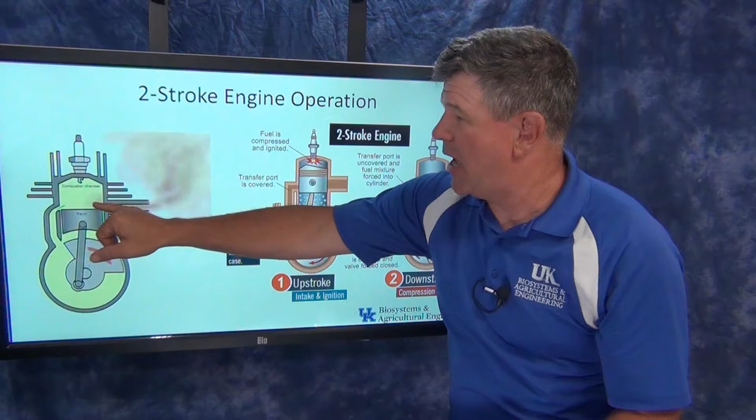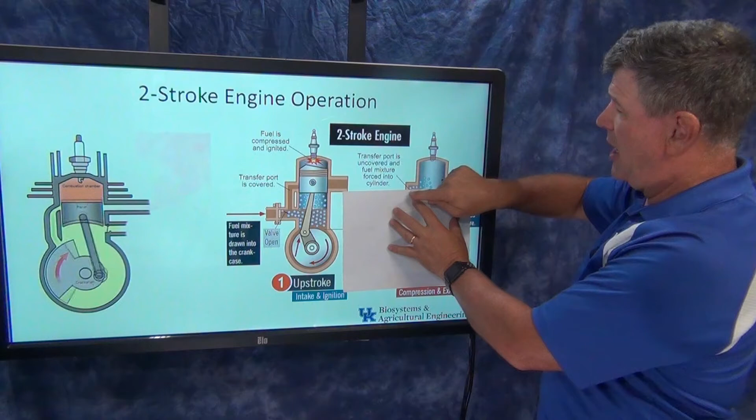And we kind of see that over here on this animation. As that piston is coming down, we see that exhaust gas start to sneak out on the right-hand side. Now let's go back here. As that piston keeps coming down, we've opened up that exhaust port. Now if it goes a little bit more, we open up that intake port, and this is where the clean gas of the air-fuel mixture can come in.

Well, how does it come in? Remember I said it was very critical—this area underneath the piston is really critical. So as that piston is going up and we're compressing that air-fuel mixture in the top of the piston, that's also bringing a negative pressure in here. So what happens is we're actually sucking some air-fuel mixture into this area underneath the piston.

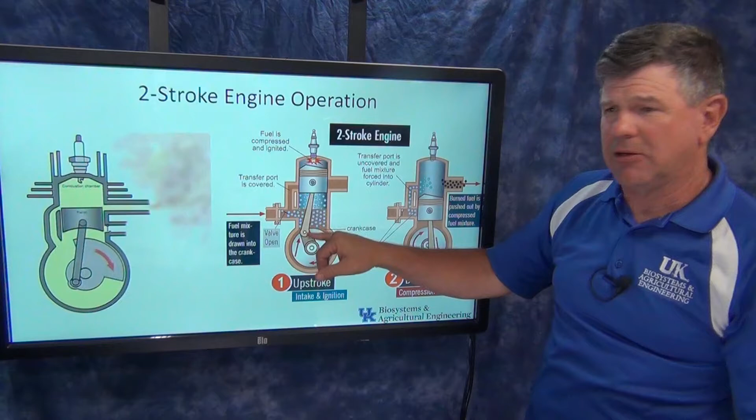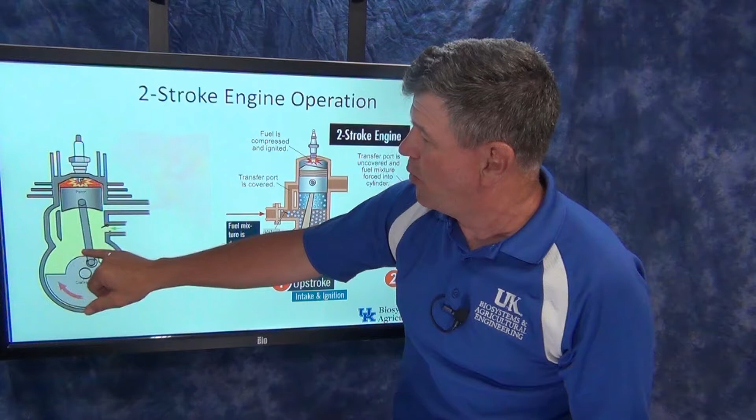Okay, so over on this animation, we see this little flapper valve, a little check valve that's allowing that to happen. So as that piston comes up, we see this air-fuel mixture coming into this area down here. Now, as the piston comes down, it's going to open up this port over here. As the piston's coming down, it pressurizes it just a little bit, so this air-fuel mixture underneath the piston is under a little bit of pressure. When this port opens up, that's going to want to pop this air-fuel mixture up into the combustion chamber up here.

So this pressure on the bottom forces that to go up into the combustion chamber. We've got a lot of things happening all at the same time. As this piston is coming down, we're letting the exhaust gas out, and we're also allowing the fresh gas to come in. So the clean gas is kind of pushing the exhaust gas out of the combustion chamber.

Okay, so again, two strokes. Now think about how much power it has. Remember we talked about the bicycle analogy on a four-stroke engine. It's like only pedaling every other time. So we pedal once, we don't push the next time. Then we push, and then we don't push.

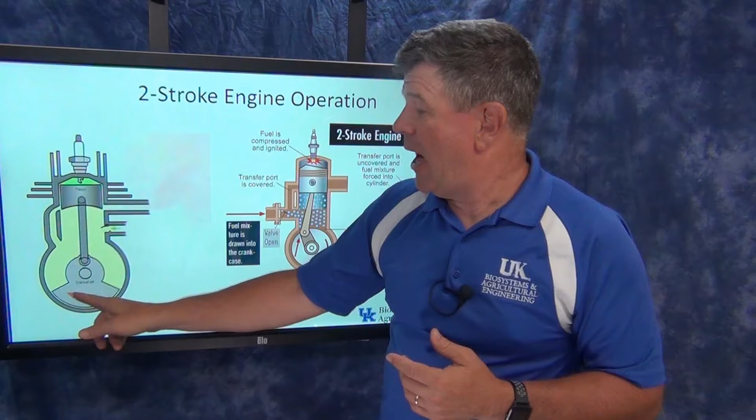Look what's happening here. How many rotations? One rotation where I come down with the power, the exhaust, and the intake, more intake as it starts back up, and then it compresses, and then another power stroke. So on every revolution of that crankshaft, I get a power stroke.

So that's going back to my bicycle. That's like we would normally do on a bicycle. We push every time that we come around, we're actually pushing. So we're going to get a little bit more power potentially out of a two-stroke engine, okay? But what are the problems with this?

We're going to list these out here in just a second on the next slide. But let's think about this. As this exhaust gas is leaving over here and the intake gas is coming in, is that going to be a clean exchange? Probably not. So as that exhaust gas is coming out and the intake gas is coming in, there's going to be a little bit of mixing in between.

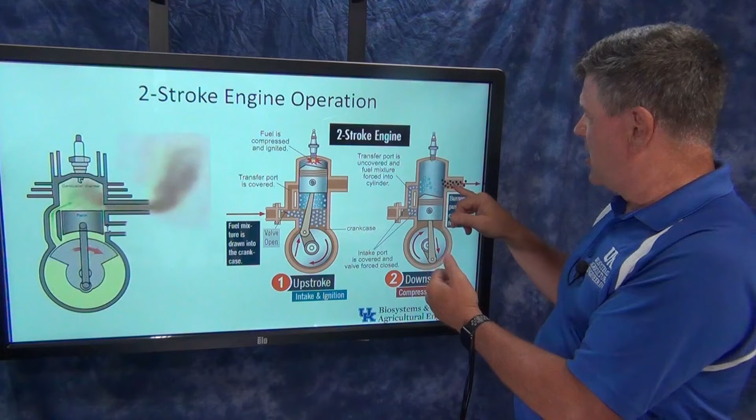So I'm either going to have some of the clean gas, the air fuel mixture, going out with the exhaust, which means unburnt fuel then is going out of the exhaust, or I'm going to leave some of that exhaust gas in that chamber there. So both of those things could be bad, could cause me some problems.

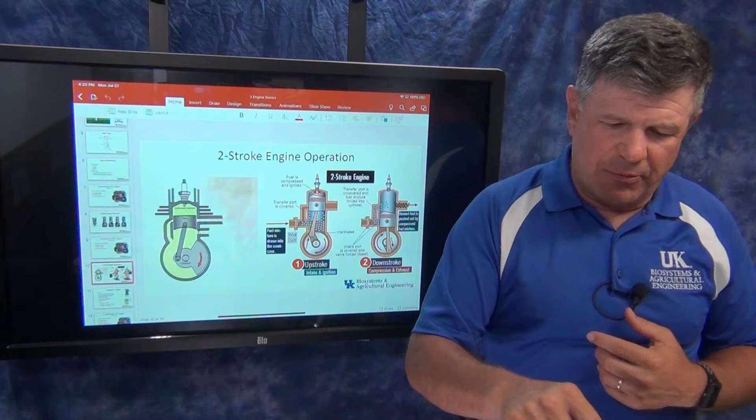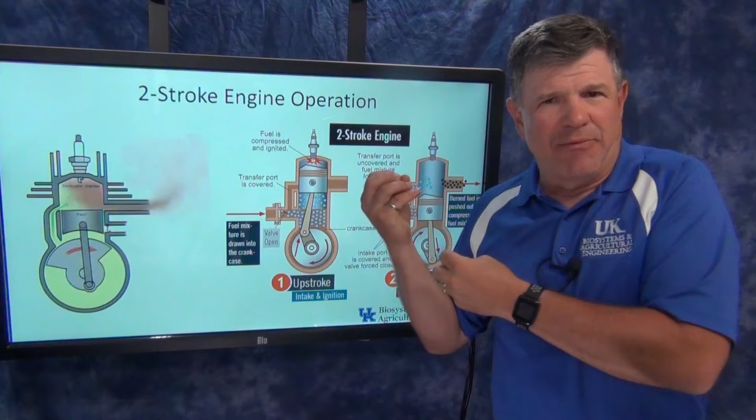So that could mean some not clean burning. If I've got exhaust gas in there, it may not burn as cleanly. If I've got air fuel mixture going out, then I've got some stuff going out the exhaust that I don't want going out the exhaust. So now I've got some emission problems. That's one of the fundamental drawbacks of a two-stroke engine, this idea that we've got some potential emission problems in there.

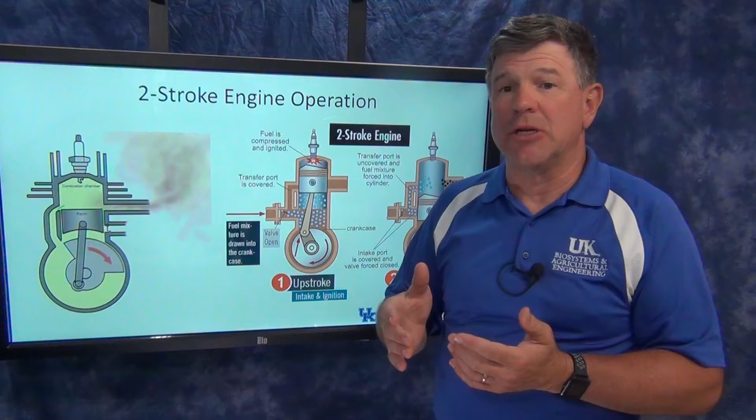The other thing that goes on with this is that because this is an air-fuel mixture in this chamber underneath the piston, I've got to have lubrication in there. If I go back to my four-stroke engine, I'm going to put lubricating oil in there and just let it lubricate. I can't put oil in here. So what do I do? I actually mix some lubricating oil with the gasoline or with the fuel as it's coming in. So this is an air-fuel mixture in here, but there's also a little bit of lubricating oil.

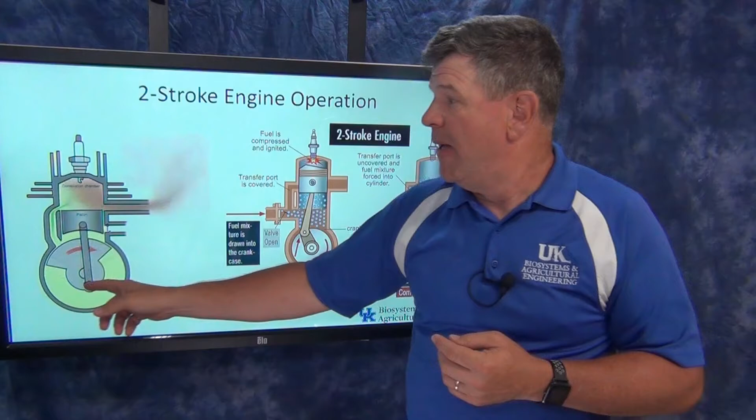Guess what? That lubricating oil is going to go up in here and get burnt. What happens when we burn oil? It makes smoke. And so we've got some more emissions issues out there. So those are kind of the trade-offs.

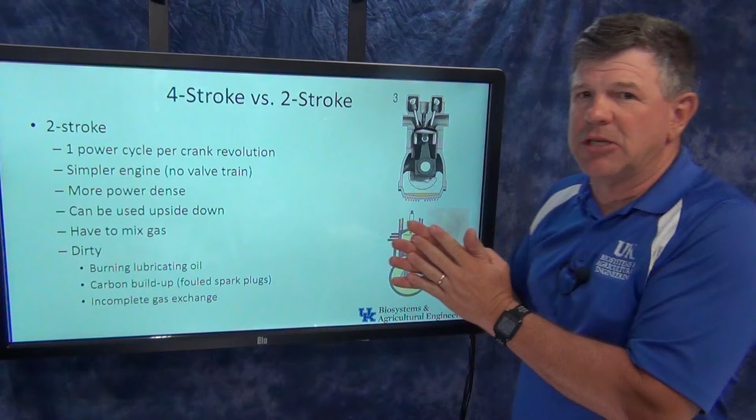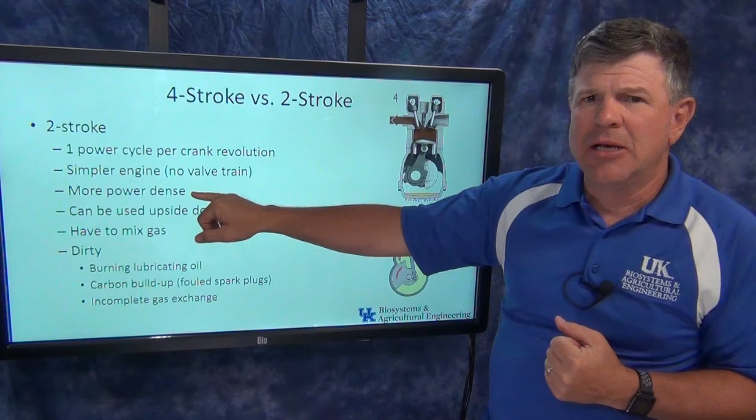So let's list some of that out and think about two-stroke versus four-stroke engines. First of all, with the two-stroke, we'll focus on the differences here: one power cycle per revolution of the crank. That's a good thing, okay? So I get a little bit more power out of them. We talk about them being more power dense because of that, and really there are two reasons.

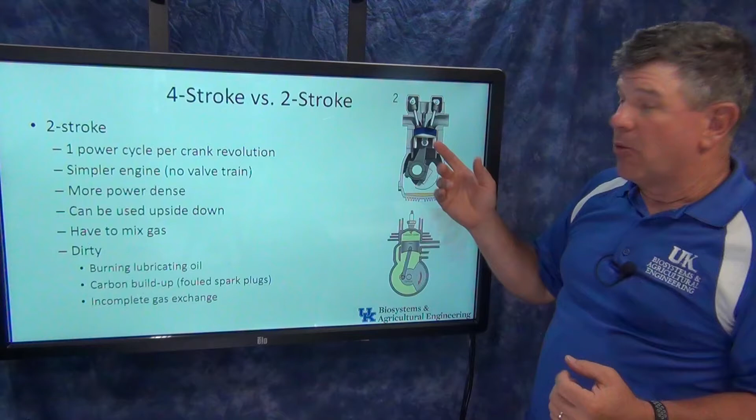So we get one power cycle per crank revolution, and it's a simpler engine. Remember on that 4-stroke engine, we had to have valves and camshafts to open up and let the gases come in and out. Down here, there's no valves, just ports that I'm opening and closing, so it becomes a much simpler engine.

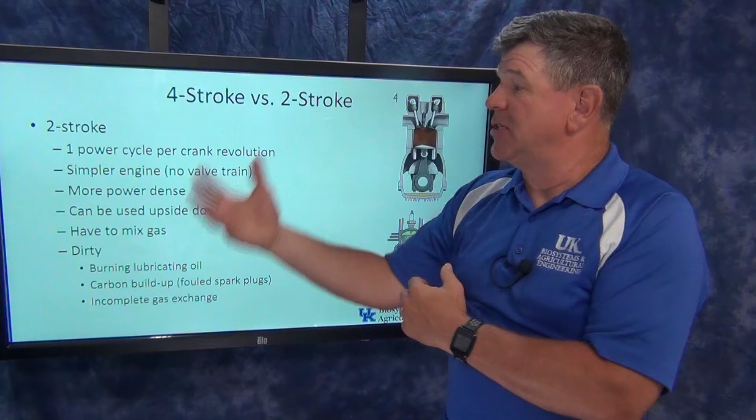That's one of the nice things about the two-stroke. It's a simpler engine, which means it's a lighter engine, and I get one power stroke for every revolution of the crank, so I can get more power out of it, so they can be more power dense. This is why you see two-stroke engines in performance motorcycles, competition motorcycles.

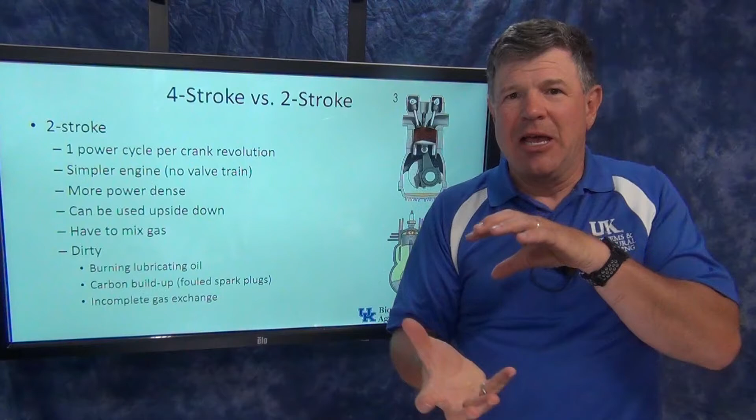I can have a lighter motorcycle and get a little more power out of it. In a performance setting, emissions, okay, I can deal with some emissions. You see a lot of these in small gas engines like chainsaws and weed eaters, string trimmers, because one of the other things is I can turn this engine upside down. It works in all different orientations. This one may or may not, because if I get oil up against this piston, it may cause problems if that engine's not designed correctly, so those are some things I have to be thinking about.

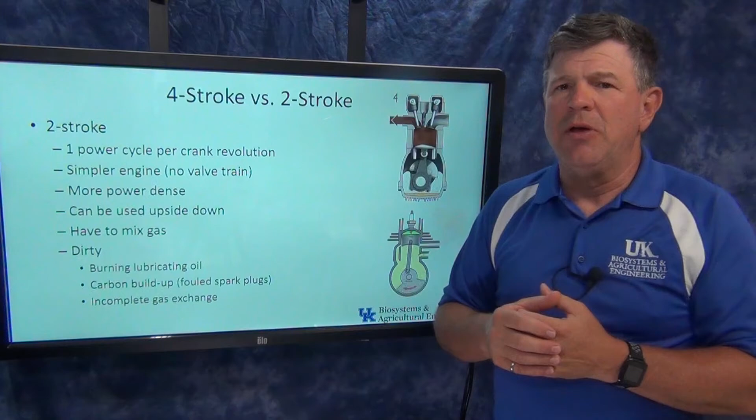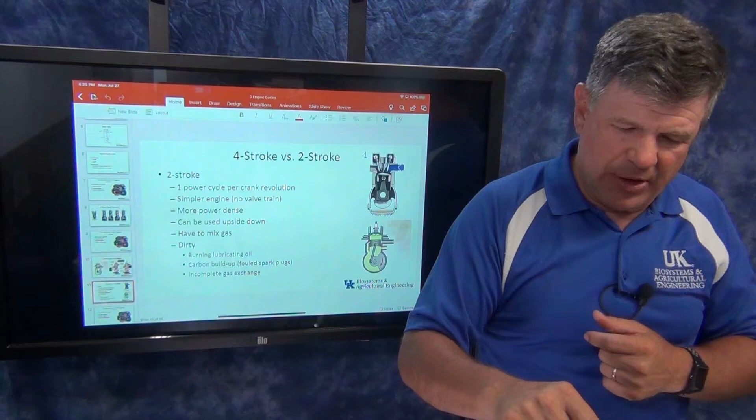So again, it can be more power dense, I can get some more power out of it. That's one of the differences between a two-stroke and four-stroke. They can be used upside down, but I have to mix my gas with a two-stroke engine. I've got to put some lubricating oil with that fuel, so that fuel has to have the lubricating stuff in it as it goes through.

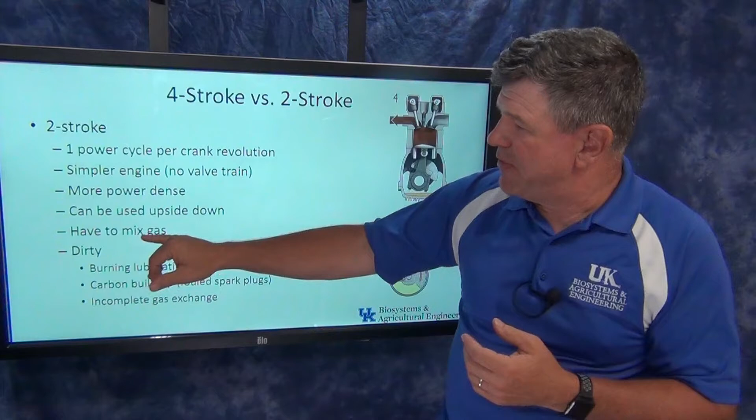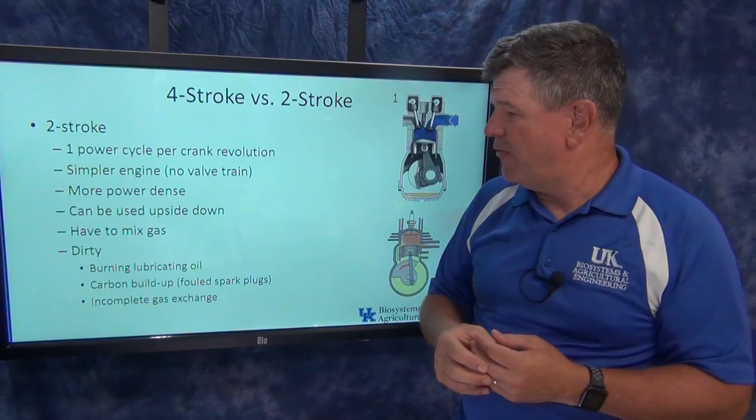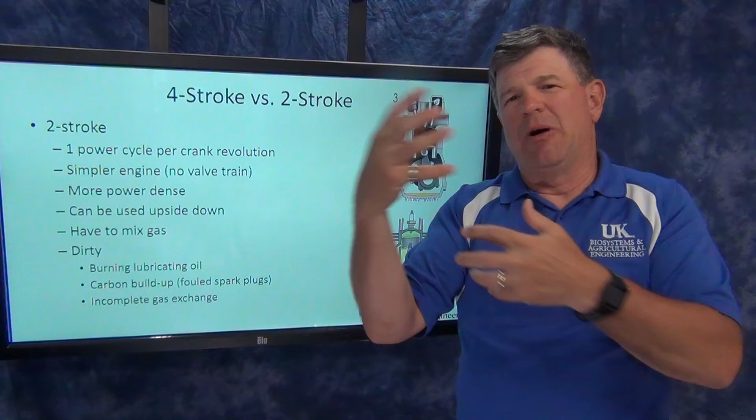And because I'm burning that lubricating oil, that's going to mean my exhaust is a lot dirtier. I'm going to have some carbon buildup from burning that oil, which means my spark plugs tend to foul more often. I'm going to have that incomplete gas exchange when I've got that intake fuel coming in trying to push the exhaust out, and they mix in the middle, so I get that incomplete exhaust exchange. That gives me a lot more emissions and can reduce power if that's not done correctly.

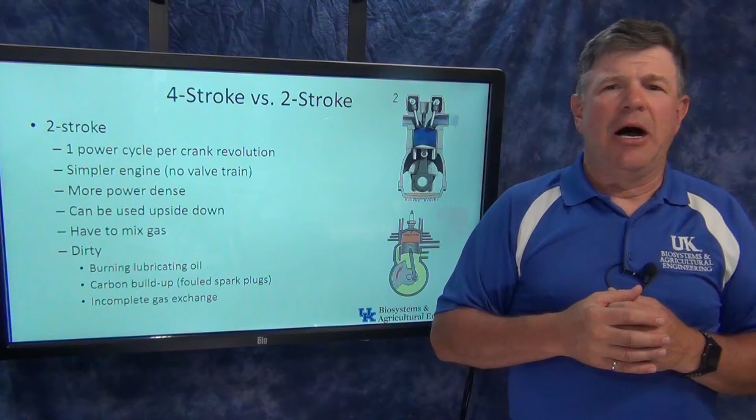Now there's a lot of different engine design things that engineers will do to try to improve that, and so we can actually make some of those engines fairly clean, but that can still be an issue with a two-stroke engine, and that's one of the drawbacks to it. So when we're comparing two-strokes to four-strokes, there's reasons why we might like each, but the reason the four-stroke is more common in most of our vehicles is primarily because of emissions.

You see a lot of regulations, like in California and places like that, where they actually prevent the sale of two-stroke engines, so manufacturers have to design four-stroke engines for typical applications like string trimmers and chainsaws for sale in markets where emissions are more critical. So that's two-stroke engines, four-stroke engines, the difference between those, trying to get our head wrapped around how they work. Again, there's always four basic functions that have to happen: compression, power, exhaust, and intake.

Those four functions have to happen. On a four-stroke engine, that's a one-to-one, each function happens on one stroke of that engine. On a two-stroke engine, we kind of combine them, so a couple things are happening on each stroke as it goes up and down. So there you go, that's two-stroke engines.